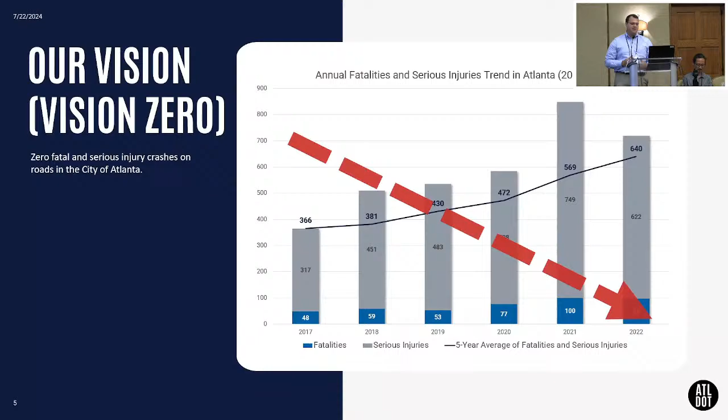Now, the City of Atlanta is a Vision Zero city. What that means is our city council in 2020 adopted the Vision Zero safety program, and that legislation was within just a couple months of the legislation that created our Department of Transportation in the City of Atlanta. So our department and safety have always been very closely linked. This came from the background of our comprehensive transportation plan, completed in 2018, which put safety as the number one system for us to solve, and that's what we've built off of in creating a department and doing our Vision Zero program.

Since then, you can see some of these milestones how these have come. We started on our Vision Zero action plan, which was completed at the end of last year.

We got awarded in 2023 an implementation grant for the Pryor Street and Central Avenue Safe Streets project. And here we are in 2024, we've applied for another grant opportunity from SS4A, which we will talk about.

First, some background on our Vision Zero action plan. This was just completed, hot off the press in November of 2023. Our partners at the Toole Design Group helped us out with this, and it's available on our website, you can go and look at it. My presentation today will focus on three sections: the data analysis that supported this work, our Safer Streets checklist, and our implementation plan.

So first, on the data analysis side. This is a very big problem we're trying to solve, and we have very finite time, resources, and people. So prioritization is key. We've got to focus on areas where we have the best return on investment, the most impact.

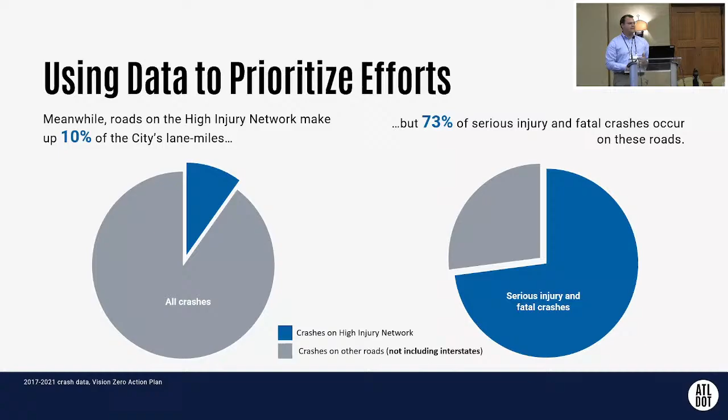In other words, they're 10 times as likely for that crash to result in a serious injury or fatality. So we prioritize them. Next, we looked at locations on different parts of our city. What we saw is that the least safe 10% of our roads in the city by lane miles account for 73% of the serious injury and fatal crashes in the city. This is including our locally owned and our GDOT state routes, but excluding the interstates.

Thankfully, serious and fatal crashes are still pretty rare occurrences. However, what that means is that we might have many locations that are just as unsafe, and we just haven't had one of those serious or fatal crashes happen yet. We hear from people every single day. They'll tell us, I know this is unsafe. Here's the issue: does somebody have to die for you guys to do something about this? And the answer, obviously, should be no.

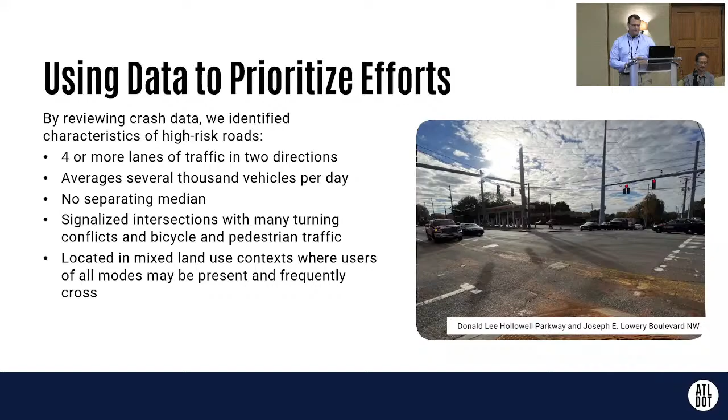So that's where we tried to look systematically at the common characteristics of the areas where we saw high crash rates. What we can see here is roads that have 4 or more lanes of traffic in 2 directions, averaging several thousand vehicles per day, not median separated, a signalized intersection with turning movement conflicts and a lot of bicycle and pedestrian traffic, and mixed land use where we have multiple modes trying to cross one another. With that, we were able to create our systemic risk network.

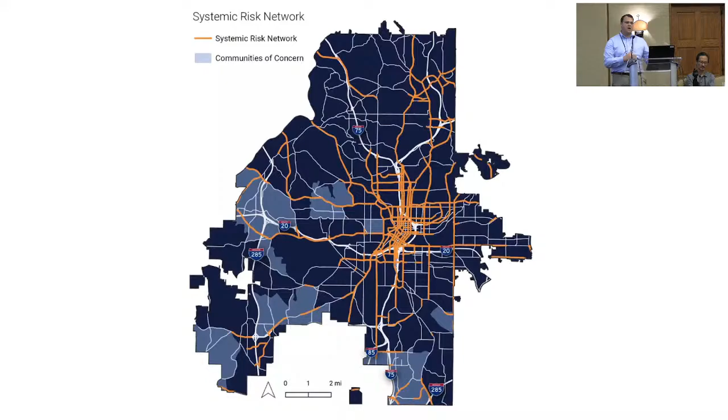This is everywhere we want to prioritize from a safety perspective, not just where there have already been crashes. Next, we looked through an equity lens. We looked at socioeconomic data to identify the communities where the residents who live in these areas are the least well-served by the current transportation system. We know people in these areas are less likely to own cars.

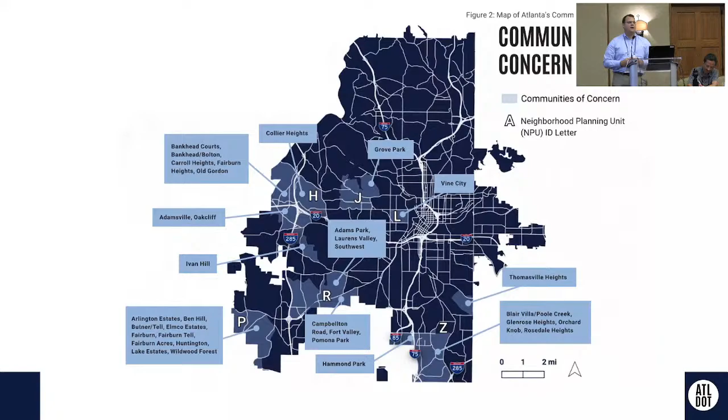Their lives are more likely to be affected negatively when they end up in a crash or they lose access to their car. And when they are involved in a crash, they're more likely for that crash to be a serious injury or fatality. So we prioritize these areas. You can see this map here of our communities of concern. These are mostly in the south and to the west of the city of Atlanta.

That concludes the data analysis portion of our Vision Zero action plan. Now I'll talk about our Safe Streets education guide and Safer Streets selection tool. This is our toolbox, specific to the city of Atlanta, of countermeasures that we have seen to be successful in mitigating the kinds of crashes that we see most prevalently in the city, and which have been replicable. These are things already implemented within the city, and our users and local officials are familiar with these types of countermeasures.

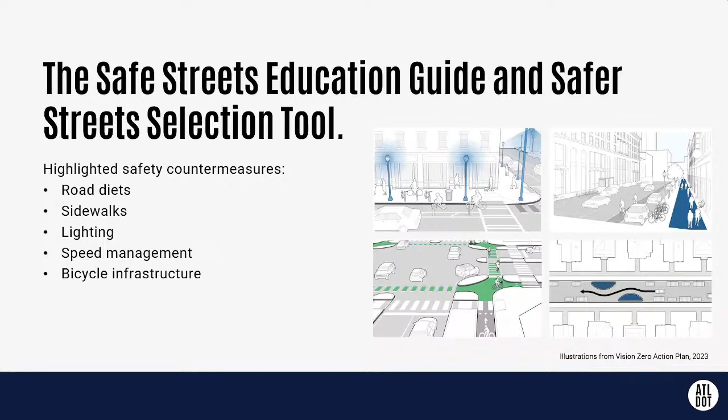This is kind of our localized toolbox, and the education guide and the selection tool work very similar. If you're familiar with GDOT's intersection control evaluation or ICE tool, the goal here is just to put these design alternatives at our forefront, to be considering them in all of the projects that we do, not just for our engineers, but also our elected officials and other leaders within the city.

And then we also have systemic safety countermeasures. These are basically things that we've identified in the city of Atlanta that we say are broadly applicable. We know that they work at any location where it is desired. This can be implemented without any further crash analysis or traffic analysis. And I'll go a little bit more into these as we talk about implementation.

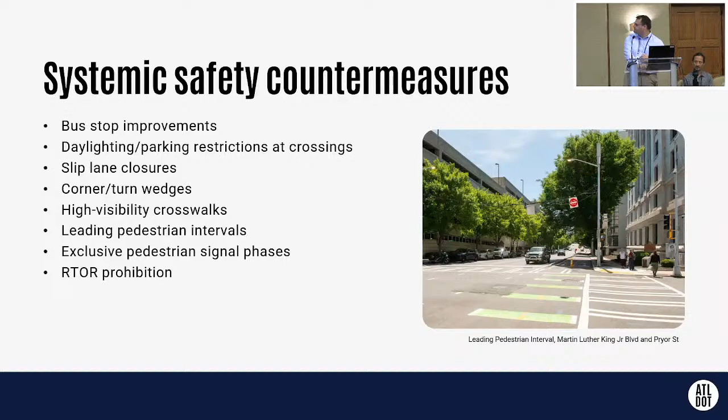Which is where we are now. So our Vision Zero action plan includes an implementation plan, which is built on a few key pillars, I guess you could say. The first of these being our capital projects. So in 2023, Atlanta voters approved a massive $450 million bond and T-SPLOST program to fund capital projects. And so in the locations where we have those capital projects funded, that is going to be this very first opportunity for us to apply our Vision Zero goals.

And that can be doing Safe Streets projects. We have a ton of Safe Streets projects, $90 million worth included in that plan. However, even on projects that aren't explicitly safety focused, we can prioritize which ones we do first based on these criteria that we have, our high injury network and our systemic risk network. And also these projects that aren't necessarily safety focused in nature, we can still make sure that these safe countermeasures are incorporated within the design.

And then next we have other action items. We'll take a look at what some of those are later on. But these near-term actions are sort of departmental and organizational in nature, of just kind of how we position ourselves and the areas that we prioritize our budget in order to try to tackle Vision Zero. And then these short and medium-term actions you can think of as the kinds of things that might lack capital funding, but we know we want to generally see these types of things happening citywide and try to tackle that as soon as we can and find funding for those as soon as we can. So very, very aspirational.

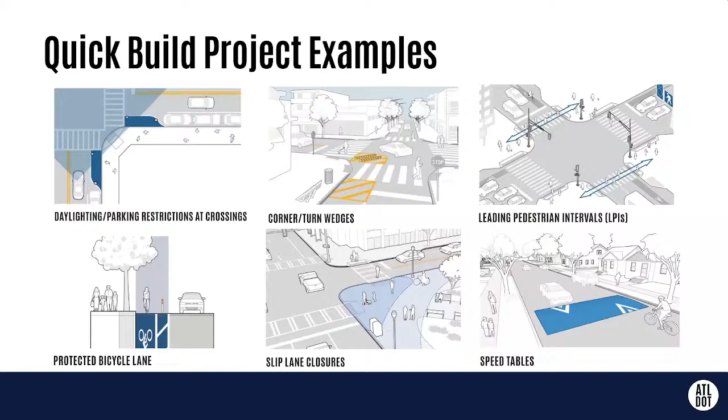Here's an example of what one of those quick build projects can look like. This is something we are working on right now and can get even more funding from this grant opportunity, called micromobility corrals, and these basically serve a twofold function.

First, accomplishing daylighting by setting aside say 20 to 30 feet right in front of an intersection. But then we actually use that space and put in bike parking, bike racks, a place to stop micromobility devices - those Bird and Lime scooters - to have a dedicated area that people can use. So it gives a community benefit as well.

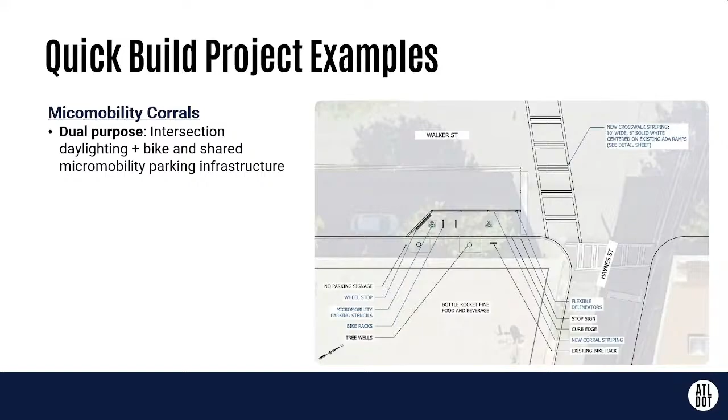The second item included in this grant application, to be funded by SS4A, is our Fatal Crash Review Commission. We've already created this commission, but what we don't have is a dedicated funding source. This would provide dedicated funding every single time we have a fatal crash, to go out and do safety analysis, a site visit, identify immediate countermeasures that could help prevent that crash in the future, and also have that pot of money to do quick build projects on these locations case-by-case.

And then finally, these are other Vision Zero action items that we have - I won't read the entire list, but I've got two slides to show just some examples of the kinds of things in this action plan that are currently unfunded or have very limited funding in our city's budget.

That includes things like creating a striping squad - for those who know our pothole posse that our mayor created, this is just a dedicated team with manpower and resources to address painted striping, illegible markings, and things creating unsafe conditions that require us to be out there addressing them today.

Some other things on this list are LPI implementation. Our city council actually passed legislation calling on our Department of Transportation to implement leading pedestrian intervals at every single signalized intersection in the city where deemed safe, including our GDOT-owned intersections. Even though it's mostly just coding a signal timing change, that takes manpower - capacity we don't have, and we don't have a dedicated funding source right now. In many cases, especially with GDOT intersections, more traffic studies may be needed before we can actually implement it.

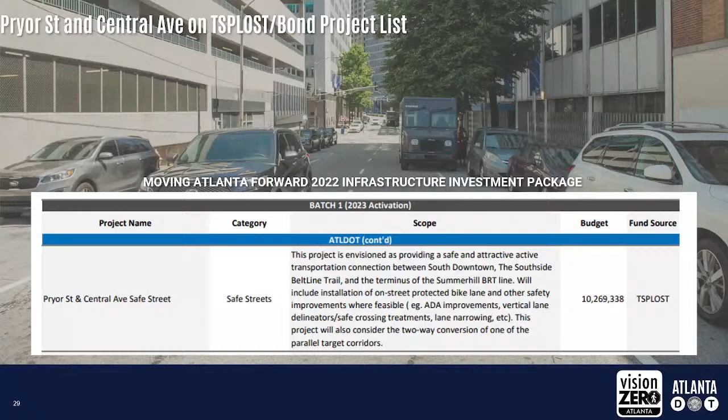We had about $10 million earmarked for this, and this would connect downtown to the Beltline and go through the South Side neighborhood. We were able to take that $10 million and instead leverage it as a local match of 25% in our grant application for SS4A. We were awarded the full $30 million that we requested, giving us a $40 million project budget to extend the limits a little bit further up in downtown, make that full connection to the Beltline, and incorporate some more project features, which I'm excited to tell you about.

So what are these streets? What's Pryor Street? What's Central Avenue? These are a north-south one-way pair in downtown and south of downtown. They cross over both I-20 north and south and I-75. So these are important connections across the interstate.

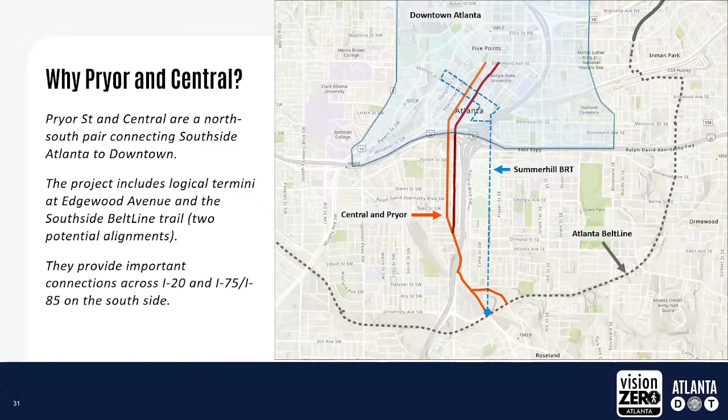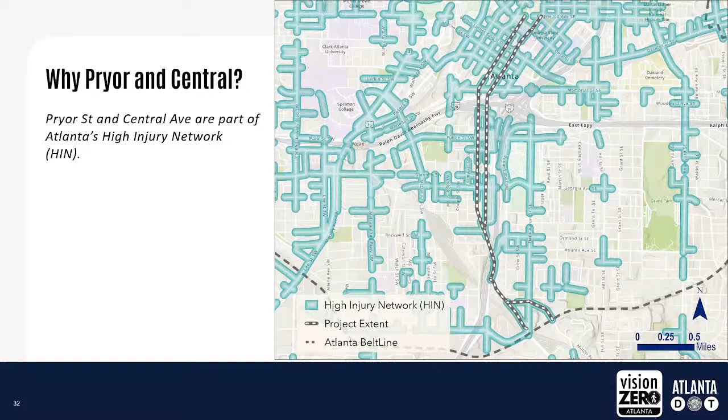Other features here, at kind of south of where that arrow is, they join together at Pryor Road as two-way south of that point. And then you can see where that connects - the dotted line is the current/proposed alignment of the Beltline. Both of these roads, basically the entire project, is part of our high injury network, and you can see it intersects with a lot of other roads that are on our high injury network.

Also from the safety side, we have a big history of historical crashes. Depending on which years you select, we've had a couple of fatal crashes, both vehicle crashes and pedestrian crashes that have resulted in fatalities. You can see a very consistent grid of crashes there in downtown where we have that kind of bumper-to-bumper traffic and a lot of signals.

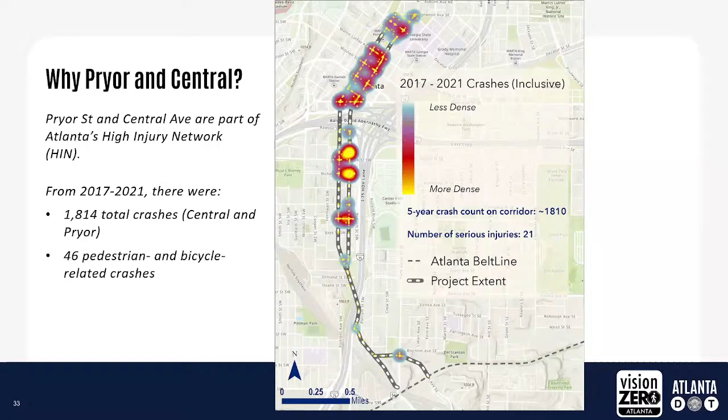And then more focused clusters of crashes south of I-20 where we have higher operating speeds. We've got some on-ramps and off-ramps going to and from I-20 and the downtown connector. And so that speed differential, and where people are getting over multiple lanes either to get on the interstate or to make a turn right after they got off of the interstate, is resulting in these serious crashes.

From that equity standpoint, that south side neighborhood that's in this area that would be connected is a historically disadvantaged neighborhood in Atlanta. It's one of these that has been affected and separated by the interstate system that came through Atlanta. So this is an opportunity to help to connect and to better that neighborhood as well.

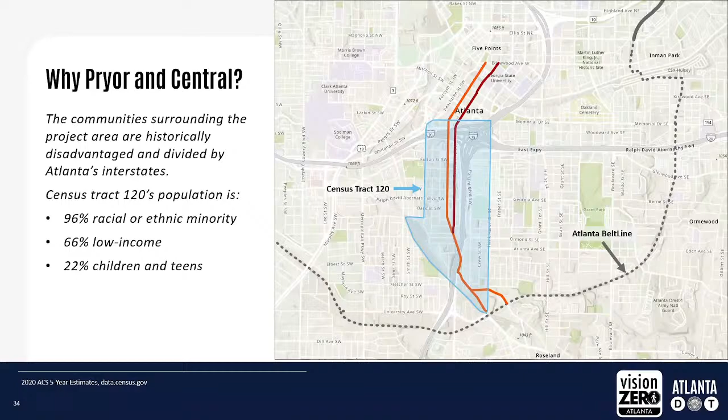Another great opportunity with the Pryor Street and Central Avenue project is we just have a very, very big canvas to work with. We have a lot of space out there. We've got 3 to 4 lanes dedicated to vehicles in each direction, sometimes a combination of travel lanes and parking lanes. We've got a lot of space out there to hopefully reutilize.

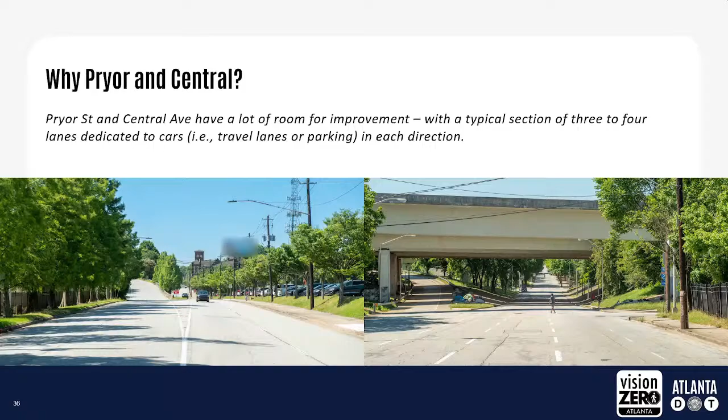You can see this is right where they come together or split, depending on your perspective. This is where, like I was saying, we have on and off ramps with the interstate. And you can see that hostile infrastructure for pedestrians, where we do have sidewalks just kind of disappear when the interstate comes around. That takes precedence, obviously, and not a very pleasant place to bike either.

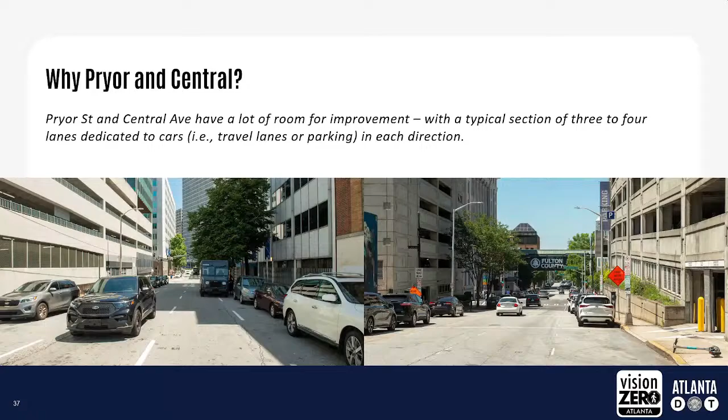And then you can see what that condition looks like in downtown - more space for parking, a little bit slower moving, but a lot of vehicle lanes there. So what are we going to do with this project?

First and foremost, we're going to resurface - that's about 4 miles of roadway. We are going to repurpose those vehicle lanes, essentially a road diet. We are going to put in protected bicycle lanes with that space that we've won back from the vehicles, right? And then all of these, with this big budget we've been able to have, is going to allow us to really, hopefully, achieve Vision Zero for this corridor.

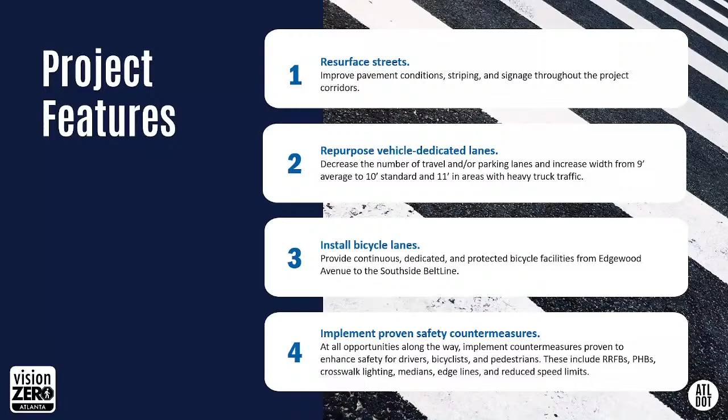And then just on where we are. So we're currently in design. We're actually working on the procurement of our design consultant right now, hoping to finish up design in 2026 and complete construction in 2029. One key element of the Safe Streets for All program is we have a hard cutoff. We have 5 years to build this or we lose the money. So we are working very, very hard to hit that deadline to get through design and to get shovels in the ground and do this.

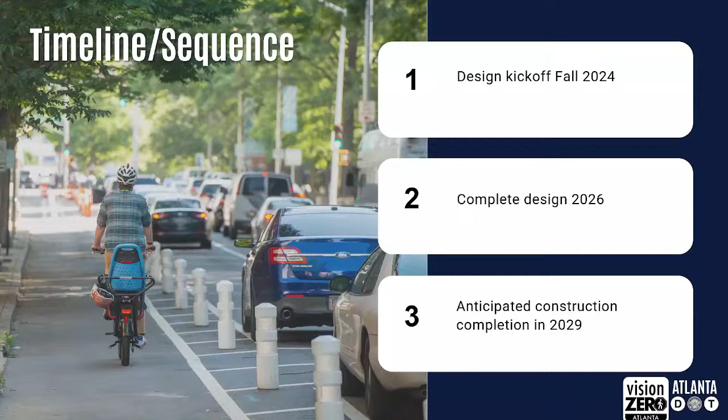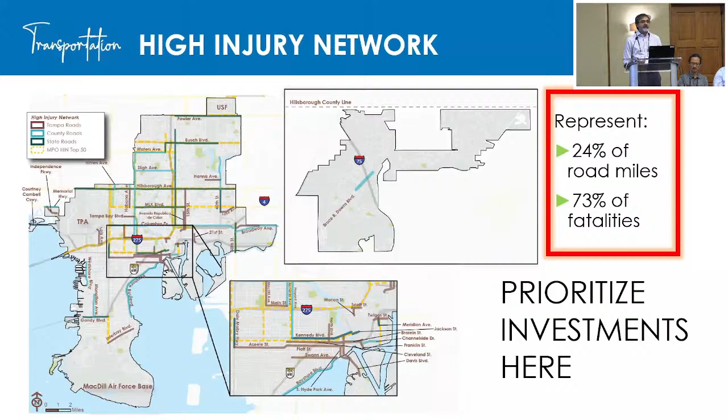So it's clearly much more than an engineering challenge. It's a social issue as well, and it's about what we ultimately as a society accept between efficiency and safety, and how do we reconcile that. So these were our marching orders.

We knew where to target these investments. The next was, what do we do about this? How do we get the benefit out there the most? The Safe Streets for All program presented an opportunity to significantly ramp up our quick build program, which uses temporary materials in lieu of concrete and more expensive materials, with some paving—which for most cities tends to be the #1 complaint in community value surveys and things like that. So it was kind of getting a bigger bang for our buck.

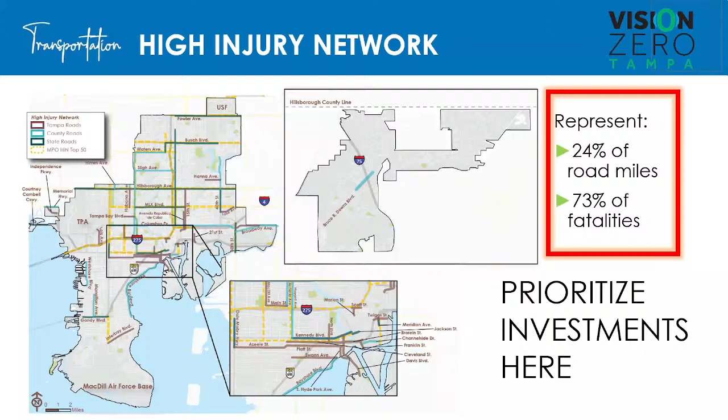And then we applied that systemically. So using our Vision Zero action plan, which is, of course, based on a safe systems approach, but we're also using systemic safety—meaning if a facility is seeing certain kinds of crashes, similar facilities may at some point also have the same problem. So kind of keeping that in mind and putting a program together.

With that in mind, with the $20 million award and $5 million match from the city—so total $25 million—we have 3 types of projects. One are triage projects, quick builds on our high injury network, to quickly get speed reduction measures, better crossing opportunities, better visibility, and redesign for bike and peds. The other are preventive care, safety improvements near places that people go to—parks, schools, transit.

And now we also have a Safe Routes to Food program, especially in lower income, lower access neighborhoods, where single parents may be lugging around 4 or 5 grocery bags along with 2 children. That Safe Routes to Food becomes very essential. That's something they do every day.

And then we also had a comprehensive pedestrian safety and equity action plan along with our MOVES, which was our mobility plan. A big feature of this was equity. That's in the name itself, Tampa Systemic Applications for Equity, T-SAFE, wherein 3/4 of the budget will be spent in communities of concern. Again, that's where the problem is, that's where the money is going, and we'll just touch upon what some of those projects look like.

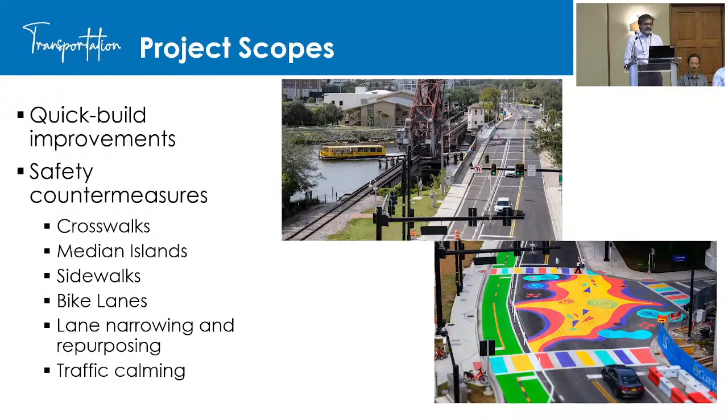That segment of the river walk does not go under the bridge. You do have to come back up on the surface, and so we've made it a little more prominent. Of course, these are all quick build projects, meaning we do hope at some point to make these much more permanent installations. So let's look at projects in general.

You've got East Tampa, Ybor City, that area in general, or historically, has been a strong African-American population or majority neighborhood. Again, a lot of arterials in the area, some collectors as well. So we've got most of our projects within that zone, if you will.

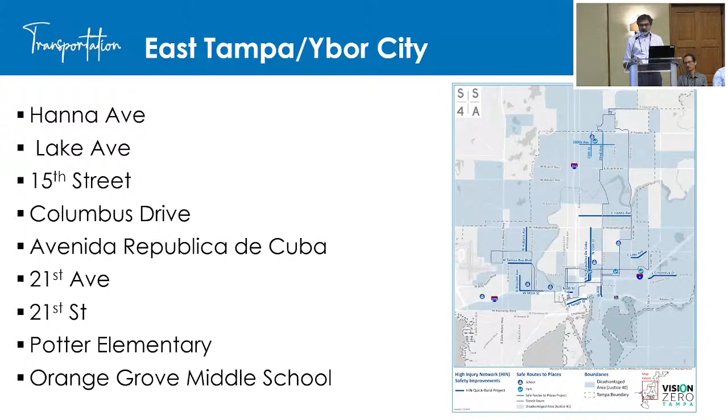And of course, this slide is for people that are more familiar with the geography, but there's a lot going on out here. Ybor City is a historic entertainment district. You've got a lot of interstate work happening in the area. And so a lot of these projects, what they aim to do is not just improve safety, but improve connectivity across the interstate, across water bodies. So connecting neighborhoods is part of it, and of course you see schools as well.

West Tampa is the other diverse neighborhood, majority Hispanic, Cuban immigrants. In fact, a lot of the Cuban immigration or migration happened before Miami in Tampa, and that predates well over 100 years back. And in Florida, there's this ongoing rivalry who came up with the Cuban sandwich, Tampa or Miami. I have a clear preference, but that apart.

So similar projects in the West Tampa neighborhood as well. West Tampa is also separated by the interstate, but also the river. So all the things that are going on in the downtown area and the Ybor area are not as well connected to West Tampa. A big improvement or a big announcement on that, as of last week, we just approved, or council approved, a contract to build a river walk on the west side of the river as well.

Tampa currently has a river walk on the east side through a build grant and other funds. We're now embarking on building that river walk that will activate the waterfront and extend Bayshore Boulevard, which is like the signature Tampa facility, and create a similar facility for neighborhoods on the other side of the interstate, and a lot of imaginary boundaries that were drawn across neighborhoods in the past.

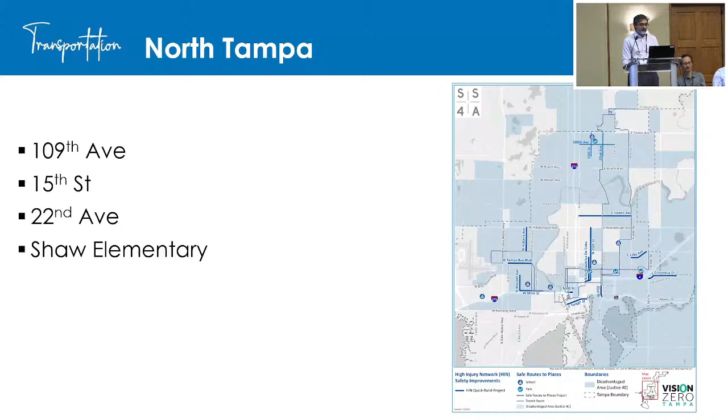North Tampa, this is by the university area, 15th and 22nd, 15th Street, 22nd Avenue, used to unfortunately be referred to as Suitcase City, meaning there were a lot of transient populations out there, people moving in and out, a lot of people that were transit dependent or walking and biking across very high-speed arterials. So some of these projects, along with the school out there, would benefit that area as well.

And in the downtown area, we've got Twiggs Street and Scott Street. So Twiggs is one of the streets in our downtown. Our downtown's a peninsula, water on three sides, that connects the channel on one end to the river and the river walk on the other end.

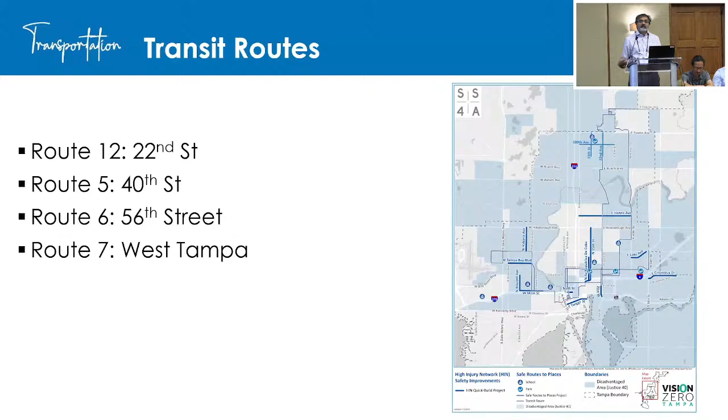And it has been contextually, even though it's part of the CBD, a faster moving roadway because of certain connectivity issues. So that was part of this suite of projects as well. We're also making better connections to transit routes, combining enhancing stops with enhancing access from neighborhoods, mainly in East and West Tampa, to transit routes.

That was part of our application and our projects also. So where we're at right now is we've done our initial planning and project development. Council just approved the grant, so we're in the process of procurement to bring on a design build contractor. We're going to try something different, creating fewer pay items, a tighter scope, and putting a design build option out there with a fixed sum to get a team that can do the most work out of it. Some of the match related work we've already started on, and it's time for implementation.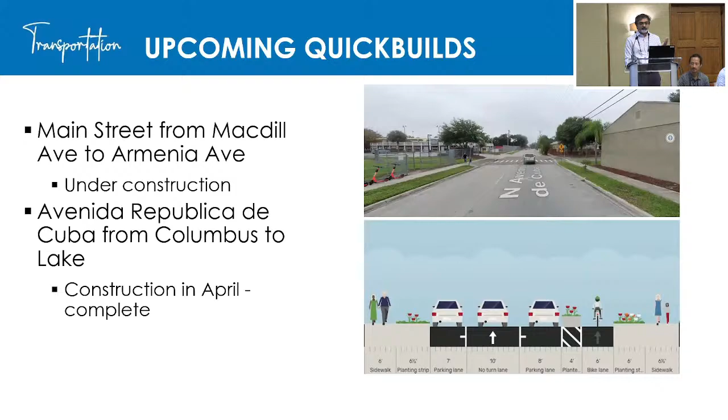Some of the upcoming quick builds that we have, I mentioned our paving team and our engineering teams work together on that. Both of these are actually complete. This is a slightly dated presentation. Main Street and ARDC were both completed last year, actually, and those were supposed to be parts of our match for the Safe Streets for All grant.

So we've also won a Safe Streets for All planning grant. That was in '23. What we just saw were projects relative to the '22 grant. Part of that, plus the build grant for the Riverwalk, plus two raise grants, similar grants connecting communities, and we have a reconnecting communities grant as well. All of these are helping transform Tampa's fabric from car-centric primarily to a city that's a little more friendly to pedestrians and bicyclists. I say a little more friendly deliberately because we have a long way to go.

All of these are quick build projects, concepts that we know will work because they're based on works in other cities as well, and we'd like to build on it. But my message to other cities is part of this success, I feel, is because we had more comprehensive planning, that five-pronged working across silos. We have a resilient Tampa plan that connects to our Vision Zero Action Plan. Our Vision Zero Action Plan is a subset of our Moves Mobility Plan. Having all of these planning efforts happen concurrently, and our Parks Master Plan as well, working together and pointing at each other really sends a message to funders that you've done your homework and you expect better outcomes hence.

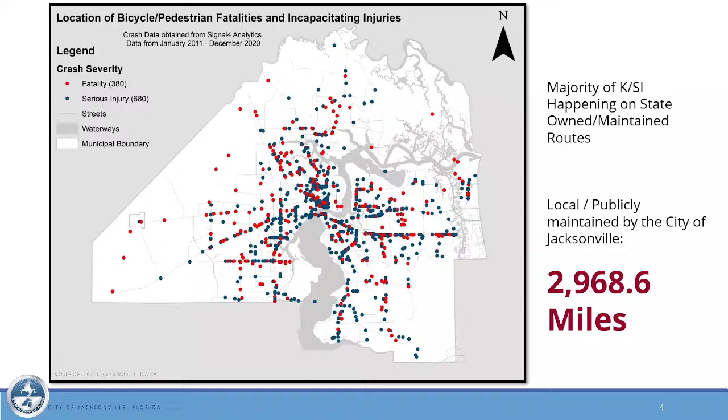But we are one of only 2 out of the top 20 that are actually getting a little bit better. It seems like the bicycle and pedestrian fatality rate keeps expanding in a lot of these other cities.

This may come as no surprise - let me talk about some more crash statistics. From 2014 to 2023, there were 396 pedestrian fatalities in Jacksonville. In that same time frame, 60 bicycle fatalities.

This is one of the reasons FHWA in 2016 began their targeted approach to safety, coming up with focus cities within focus states. They've since adjusted that to focus MPO regional areas, but the focus states remain. Florida is a focus state because we have higher than national average pedestrian and bicycle fatalities. We're also in a focus MPO area, the North Florida TPO, so we got kind of double whammied on that.

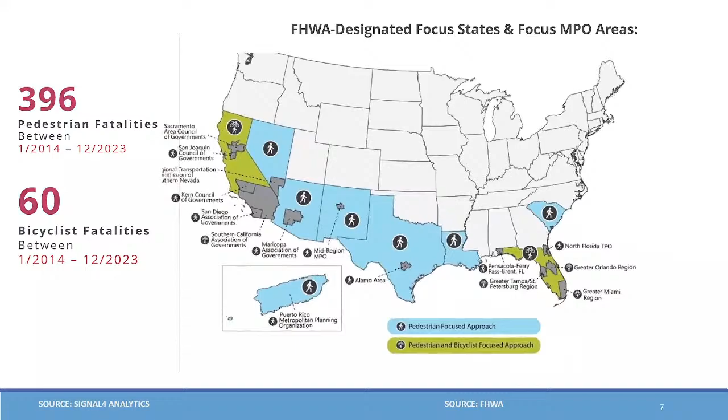The one good thing about being a focus state or focus MPO area is we get prioritized for technical assistance from the federal government. They've been really gracious with us - anytime I say, hey, can you come down and give a workshop, I'll pull together 60 planners and engineers, and they're right down there six months later teaching a classroom full of engineers all the latest design guides and roadway design practices.

This brings me to my side narrative - if you're an engineer who works closely with planners, have them reach out, even if you're not a focus city or MPO area, and see if you can get some workshops to bring in the latest designs. It should sort of be on the planners to bring these brand new designs to the engineers.

This statistic came about right as I was beginning my tenure at the city of Jacksonville. The first thing I did was ask about all of our bicycle facilities - I wanted to see where these crashes were happening. They said, well, we don't have a map of any of this stuff. So the first thing I did was create an inventory, and I wanted everything on there.

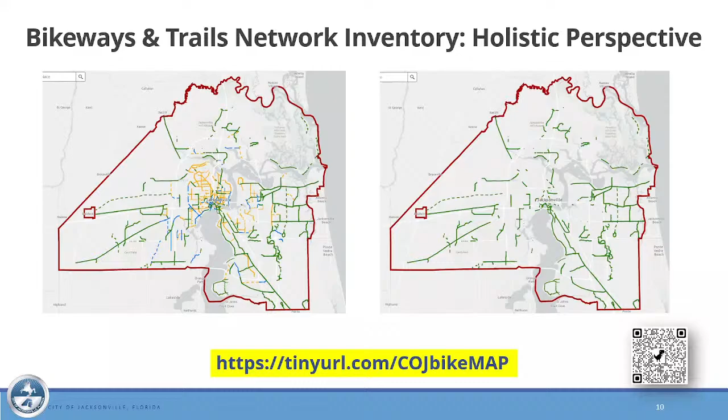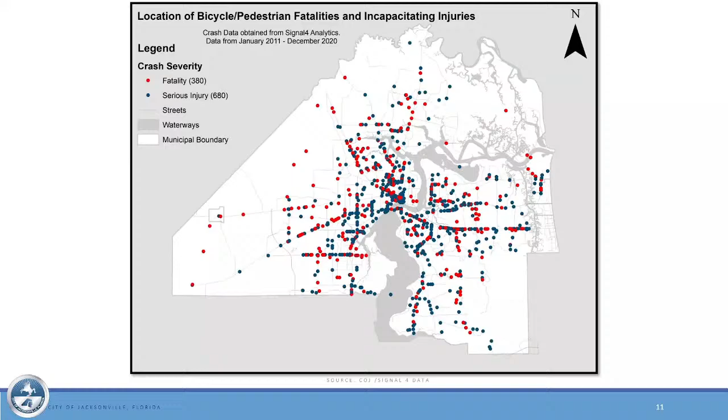I also jumped back to that crash map I was looking at from 2011 to 2020, and I thought there's a really interesting correlation - there seems to be a lot of reported fatalities and serious injuries right where we already have a lot of these bicycle facilities existing.

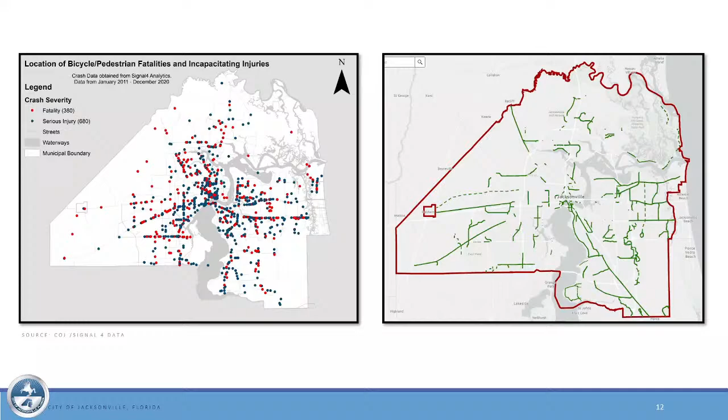So I thought, why is it so unsafe, even in areas where we have a lot of bicycle facilities? The answer I was able to find by looking at the attributes from the map we had made was the facility type. When you really break it down, we realized that in Jacksonville, almost 80% of the existing network is unbuffered bike lanes, which we know is one of the lowest on the hierarchy of things that feel safe and comfortable to ride.

You really want to focus on getting shared use paths, separating cyclists and people walking from vehicle travel. If you can't do that and you have to be in the street, make it a protected bike lane. That's second on the hierarchy. If you can't make it protected, go buffered, or if you can't do that, go with a wide, just striped out bike lane. But following this hierarchy, we realized most of what we had really wasn't that great. It was all a bunch of unbuffered bike lanes.

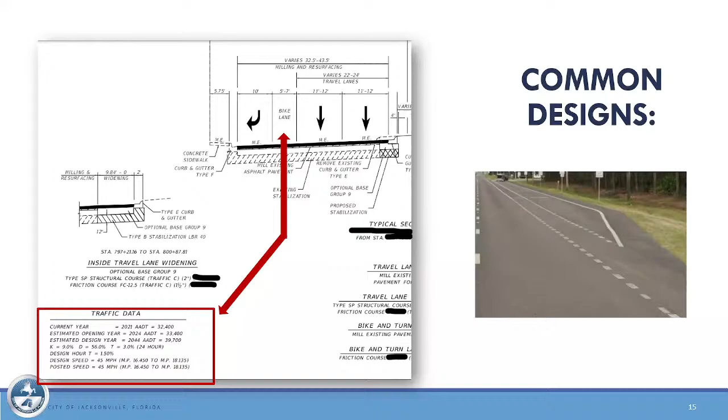One thing—when a planner goes to engineers, especially if the designs are already chugging along, and says, hey, I think we have a better idea, we could reduce the conflict area, whatever the solution may be, or the better roadway design—a lot of the responses we get are: well, it's not in the budget, it's not in the scope, it's already been approved by a bunch of people, here's a bunch of names, or the facility already includes bike lanes. So we're just going to keep it as it is, which isn't the greatest.

So with all of those responses, we said as a city, it's our priority that we're going to prioritize the 8 to 80, all ages and all abilities groups. We're not going to allow these 4-foot unbuffered bike lanes to come through, and we're going to look at that hierarchy of infrastructure and make sure that there's not only a facility there, but that it's safe and comfortable.

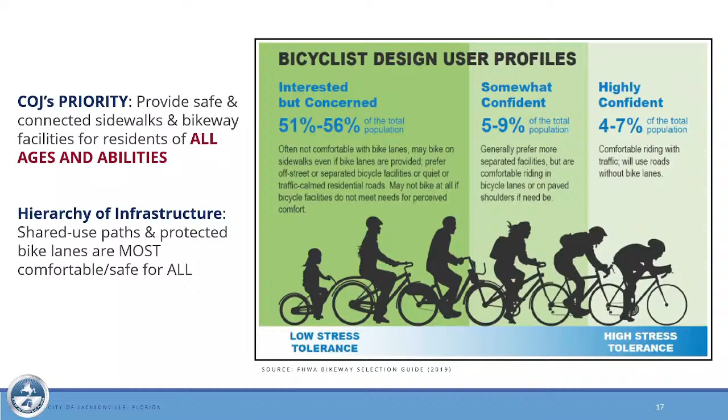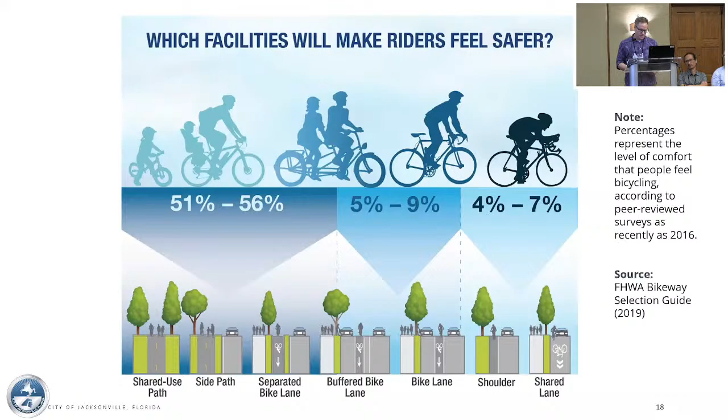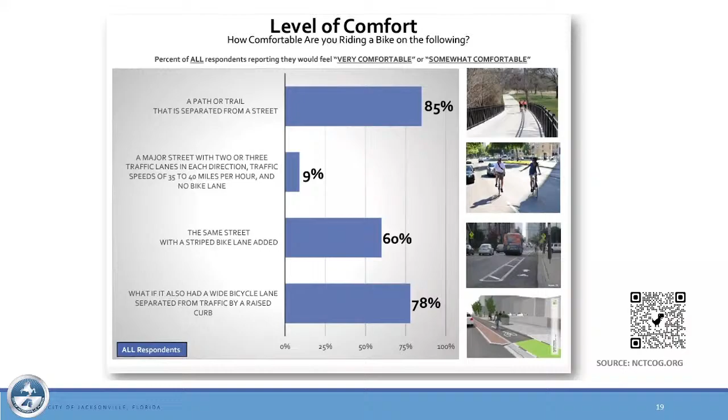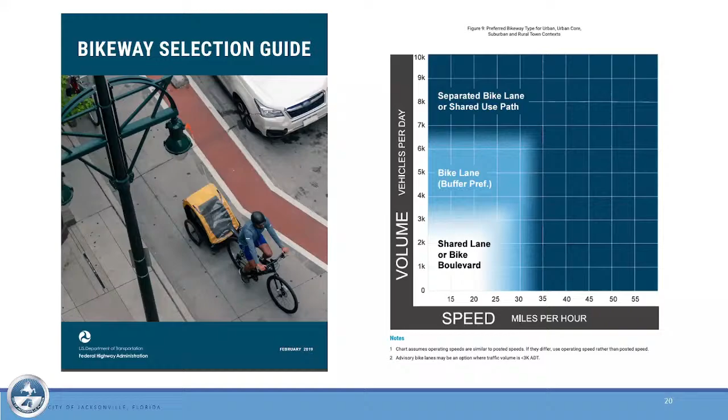I think a great rule of thumb, I'm sure many of you are familiar with this, but defaulting to FHWA's Bikeway Selection Guide from 2019, they have this awesome table that I always reference. It shows you, it puts the AADT on the y-axis and gives you the posted speed on the x-axis. I think this is such a great rule of thumb for when you've already designed most of the roadway and you're thinking, what do we want to put here for bicycles? This is a great graph to look at and say, okay, let's say we have 8,000 AADT and a posted speed of 40. We're going to do a shared use path. We've met this requirement. I think we've done our best.

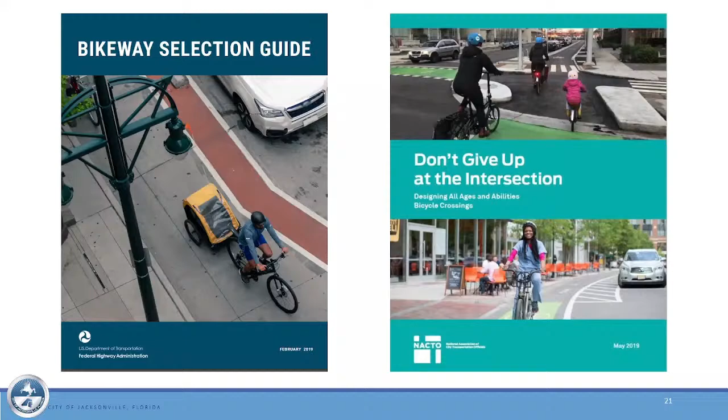This guide is also really great in tandem with Don't Give Up at the Intersection by NACTO. It goes over all of those protected intersection designs that you can utilize. It's very common in Jacksonville to have a great bike lane, but then we need to put all those left turn lanes and things at the intersection, so the cyclist is just left hanging 60 feet from the intersection. We really want to make it continuous through and keep them going. I always liken it to if you wake up and drive to work, you never think, well, I hope all the roads connect me to my job. You just know it's going to be a connected network. I think if you use this Don't Give Up at the Intersection approach, you're getting to that point with cyclists as well.

Through our Vision Zero action plan, we want to identify our high injury network. We're going to take the same systemic predictive approach. We don't want to chase fatalities, as it's called, saying the high injury network is from this fatality to this fatality. If the land use, the lanes, the posted speeds, and everything around it are similar beyond that fatality, then I think you should extend your high injury network. And that's what we're going to do.

We're also looking at a lot of recommended policies and actionable items, performance targets, performance measures, everything to get us going in the right direction.

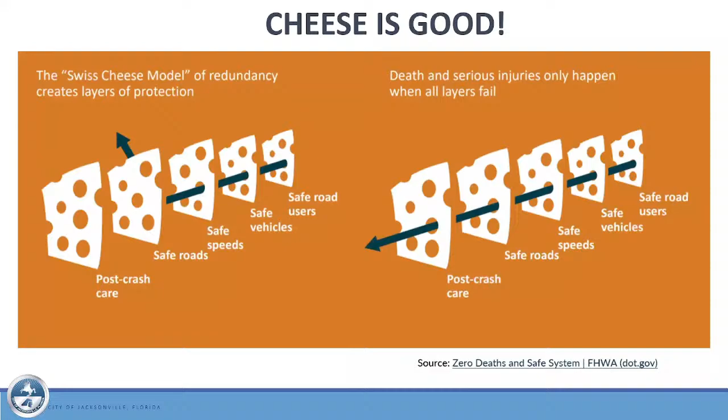Sorry, I'm chomping on my mint here.

We didn't want to wait for our Vision Zero action plan to be completed. Like I said, we're just starting it. So we went ahead and did a speed study as a way to preemptively strike some of these safety issues, which we finished this year.

I'm going to talk a little about how this also includes infrastructure investment. Investing in infrastructure was one of the problems we had in Jacksonville, where even if you proposed a shared use path or something safer for people to ride on, it just didn't have a lot of feasibility behind it.

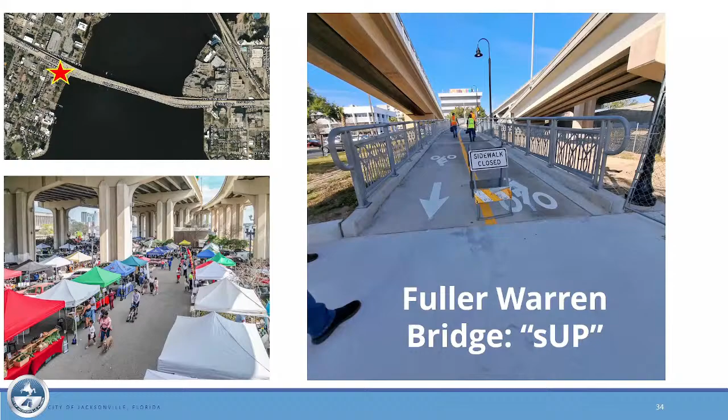So we had this shared use path, this $15 or $20 million shared use path that was going to be built by our state. I was able to go to the final bridge inspection, and I said, hey, can I add some counters just to see how many people use this, do a quick before and after? Because they hadn't actually included that in the original project.

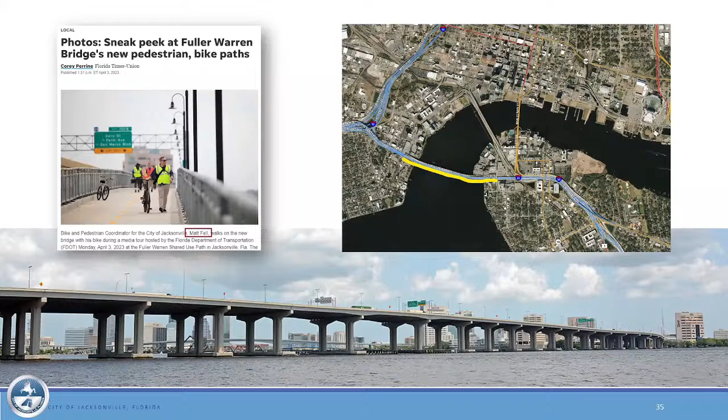And what we saw was 83,000 people used this shared use path that our state had built within the first 4 months. So it was a way to prove demand, which I think is a responsibility of planners, to help out engineers. You can't go to an engineer and ask them to do something really expensive without showing that there's demand for it and that it's going to be used.

So having planners use these counts and collect data that supports this type of demand is critical, I think, in getting a safer system. That Fuller Warren shared use path became the third most used trail in all of Florida within the first year, which is great.

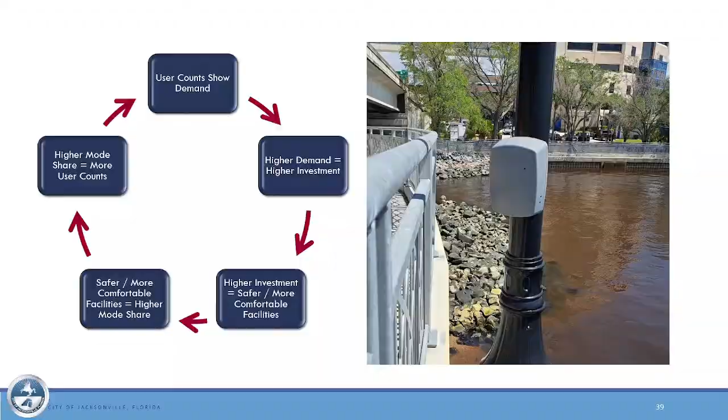Again, this reiterates how planners should use counts and show demand, and that helps grease the wheels whenever engineers want to make something more substantial that supports bicycle pedestrian infrastructure. Once we got that first Fuller Warren Bridge count and showed that demand, I kind of went crazy with counters, collecting all this data around the city, showing, hey, we need this stuff, and people really want it.

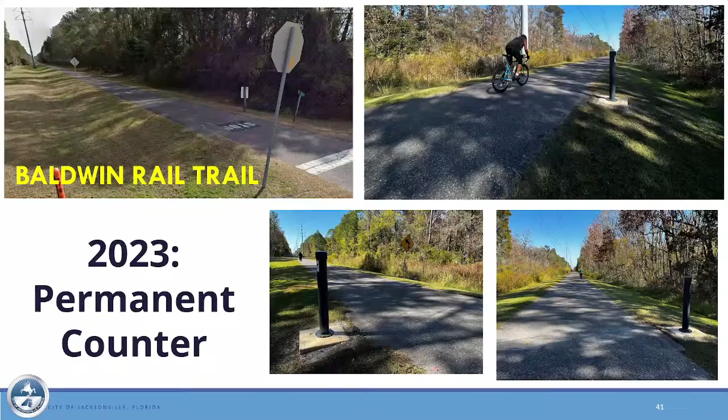We're not just a beach community adjacent city. We are a city that could be bicycle pedestrian friendly for everyone. Luckily, we had a downtown system of trails called the Emerald Trail, and that got a $147 million Reconnecting Communities grant. That trail system is now going to be built in half the time, and it's actually 16 miles in from the coast.

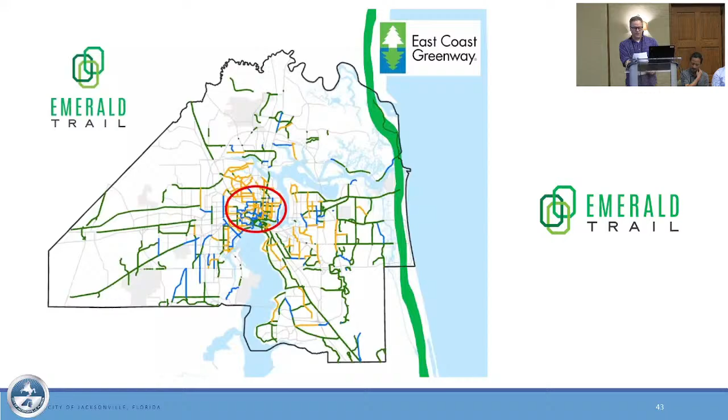We want to connect these things so everybody in the city can use them, not just the people downtown, especially since the East Coast Greenway will be coming down the coast, and we want to loop in with that.

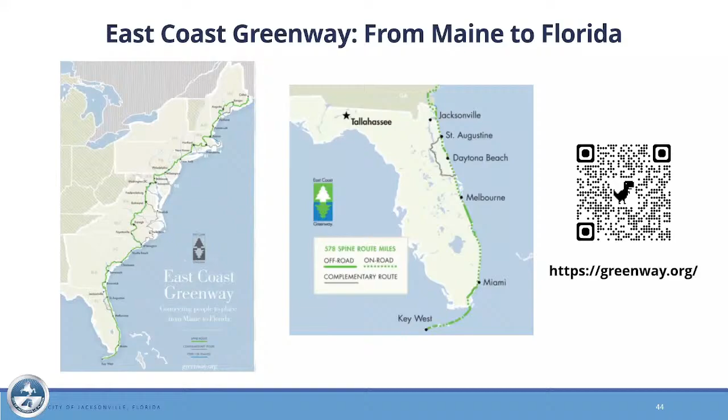Most of you may know about the East Coast Greenway, but it's a huge trail system along the East Coast from Maine to the Florida Keys. Sometimes they call it the lobster to manatee. That's something I think every city or state along the route wants to tie into, and we're no different. We wanted to do the same.

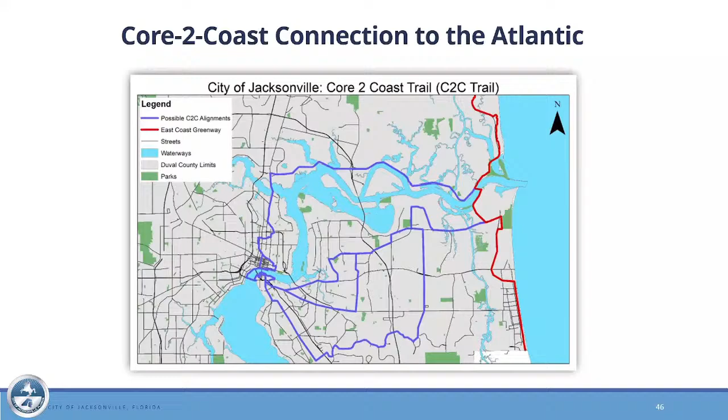This is a part of it that goes right by the convention center we're at right now. We're looking at connecting to that through a trail. We're doing an alignment feasibility study right now called the core to coast connection, so we would connect that urban core to the coast.

So a quick summary of planners and engineers working together. It's really important that we do work together, get feedback, and teach each other, working early on in projects and not waiting until things are at 90% design to say, hey, can we put some bulb outs here?

Planners must develop master plans, long-range transportation plans, share project best case studies, and share the latest guidance documents so everyone is abreast of the latest designs. Planners should also organize training workshops and bring engineers into that so people can see what's new.

And planners should document demand, as I mentioned with the shared use path, and solicit public buy-in through user counts, studies, and outreach to show that there's demand for this and make it easier for engineers to create those designs. That's it. Sorry, I went over my time a little bit. Thank you.

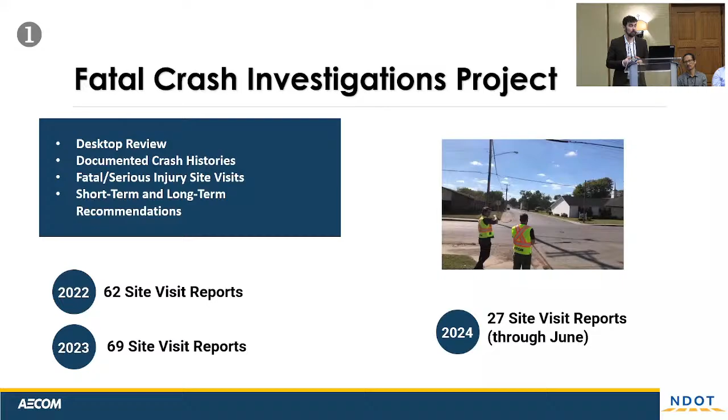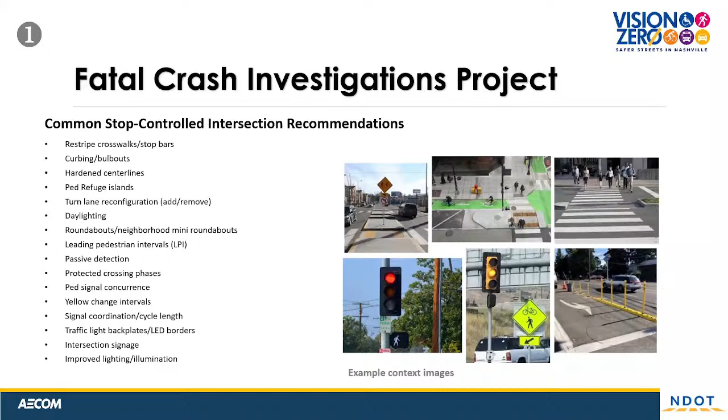I'm not going to read all of this, but essentially, the types of countermeasures we're recommending include a variety of striping, signage, configurations, signalization, operations, lighting and illumination. There's a pretty broad spectrum, and these are the most common countermeasures we recommended at stop controlled intersections, and similarly here are the most common countermeasures recommended on roadway segments at non-intersection locations.

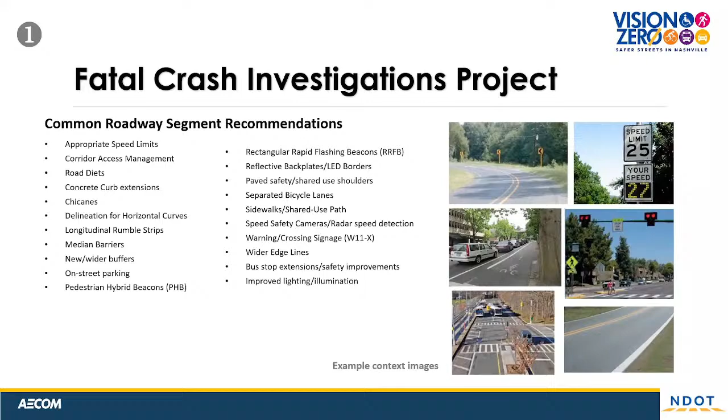The city is now in the process of implementing these. They've passed a memorandum and are allocating a large pot of funding every year to traffic safety improvements. Some of these are already being implemented - I don't have that number with me today, but I can show you some of the work we're doing to help them start facilitating that.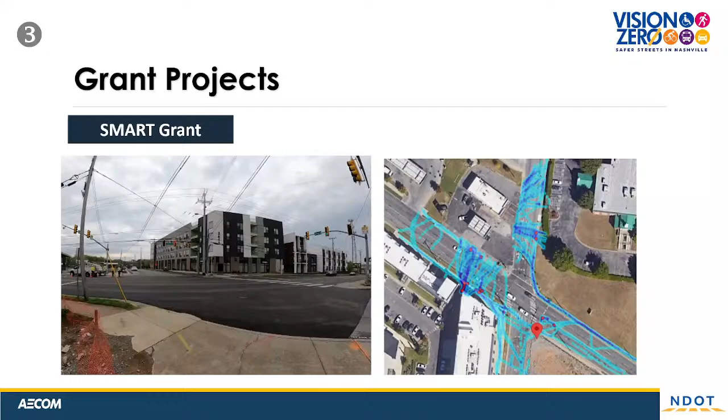In addition to targeting the improvements, this SMART grant also had a workforce development component. We worked with several universities in the area and involved graduate students. We did some onboard intercept surveys on transit routes and found out what people's preferences or concerns were along those routes. We're also doing some workforce training, working with a couple of the agencies within the area.

NABCO, and there's another one I can't remember the name of, but we're helping them provide training to their staff on how to install remote sensing equipment monitors, so they can actually go out into the field. There'll be a workforce available in Nashville to continue this project and help measure where close calls are happening or where pedestrians are crossing outside of crosswalks.

Another grant project I want to talk about is a multimodal grant we just helped the city apply for. This was on Dickerson Pike, a 1.2 mile section where there were 7 pedestrian crashes over the last few years. We helped them with preliminary high-level planning locations for some hybrid beacons, concrete medians, improved striping, curb ramps, signage and detection, providing some cost estimates for that as well.

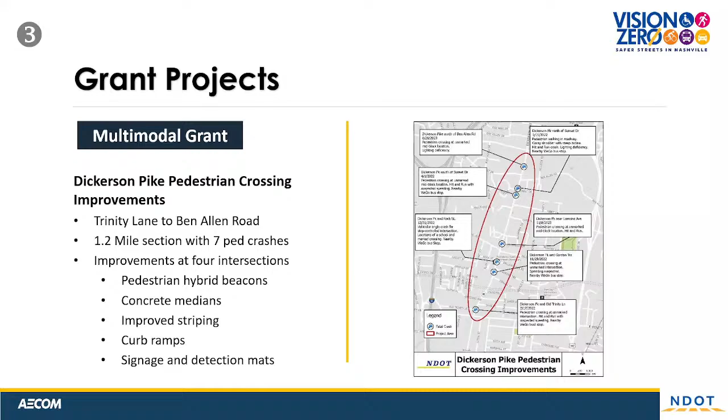Now I want to talk about the last component here - this idea of helping communities go from plan to action. The following slides are not all necessarily relevant to Nashville. These are slides and information we have utilized in several communities. It's things we are discussing with Nashville, but not things they've necessarily committed to, so keep that in mind.

Ultimately, a lot of communities are either moving to or have a plan in place, and that plan may identify a high injury network, priority areas. Some of my colleagues talked about addressing those areas with the greatest equity issues. They may set guiding principles and action themes. But in order for a city like Nashville, or another city with a lot of funding that wants to move quickly to actually implement projects, there's a need for a project pipeline - the ability to develop and track projects quickly. So we've developed several tools here that we're hoping to utilize to help them with that process.

We've developed these tools in other places - I'll mention those places as I go through the following slides. A prioritization tool, a countermeasure application tool, looking at plan concurrence, developing KPIs or metrics, developing public interfaces, and an annual Vision Zero program of projects.

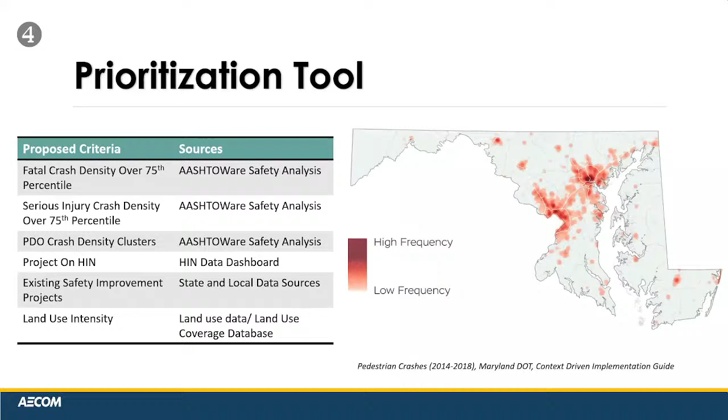We helped them, AECOM helped them through this process where we looked at a series of criteria to help identify where those hot spots were, where we didn't just look at where fatal and serious injury crashes were happening, but where the crash densities were highest.

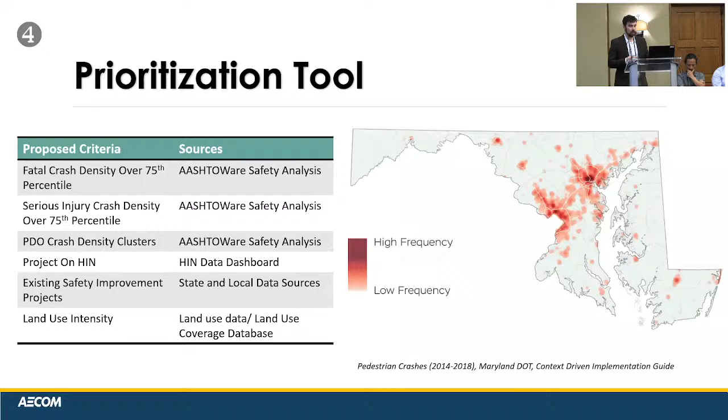So those areas with over the 75th percentile of crash density, those with over the 75th percentile fatal and serious injury crash density, the crash density of non-injury crashes, the location of projects already on the high injury network, the location of existing identified safety improvements, maybe already on a STIP or another measure, and the land use intensity. You can combine all of these things, and this may make a bit more sense, to start to prioritize projects.

You can look at those different types of crashes. You can look at demographics. You can look at short trip opportunity areas — those along a transit route or with mixed use density and development that would enable more shorter trips. So you can highlight the important elements in those areas. These factors all come together from both the prioritization side and the areas of need, and you're able to identify the highest priority locations.

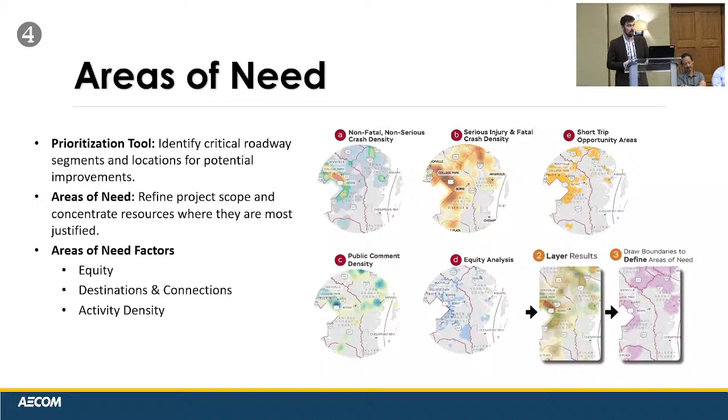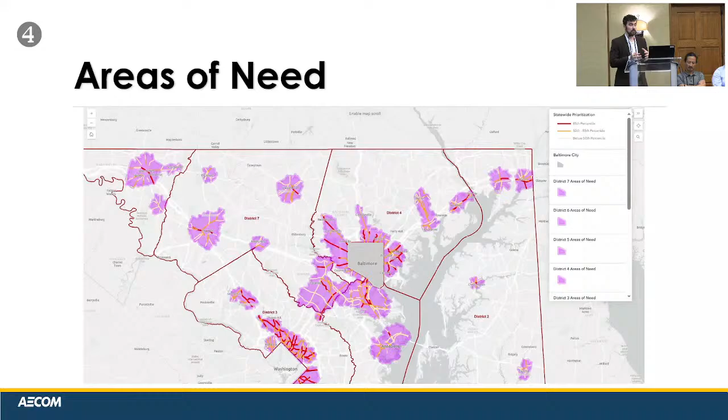This next slide provides a bit more context. Again, this is from the Maryland DOT, but you can see here where we have the high injury network overlaid with these areas of need. So you can start to take that broad high injury network and home in on those focus areas a little bit more.

Okay, the next thing I want to talk about briefly is a countermeasure application tool. We started out in Nashville talking about the 28 proven safety countermeasures developed through the Proven Safety Countermeasure Initiative through the Federal Highway Administration. But we also wanted to develop a broader toolkit.

I know some of my colleagues here talked about the toolkits they have provided. We looked at the common guidance from NACTO. We also looked at the Federal Highways Multimodal Networks Guide from 2016. We looked at peer communities — in this case, Maryland DOT and the countermeasures they recommended. We also looked at the countermeasures regularly being recommended and incorporated through the Fatal Crash Investigations Project there in Nashville. Through these processes, we identified 50, or a little over 50, countermeasures that aligned with these different sources.

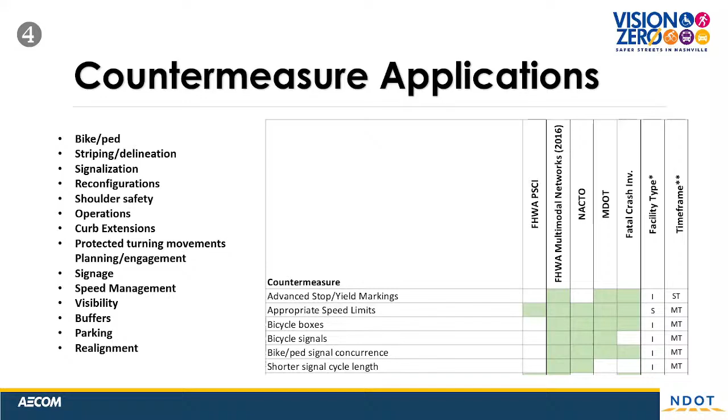So we have a table that looks at how each of these countermeasures aligns. These are the general areas those countermeasures fall into: bicycle and pedestrian, striping and delineation, signalization, roadway reconfigurations, shoulder safety, operational improvements, curb safety or curb extensions, protected turning movements, planning and engagement, signage, speed management, visibility improvements, buffers, parking, and realignment.

We basically identified whether countermeasures would be strongly recommended, suggested, or require engineering judgment, based on criteria mentioned by my colleague from the Federal Highways Bikeway Selection Guide and the Pedestrian Design Guide — looking at roadway speed, traffic, land use, and other conditions to recommend certain types of countermeasures. So for all of these, we're providing this table so you can quickly see where throughout the city different types of countermeasures might be recommended, or in any one segment, what types might be most recommended.

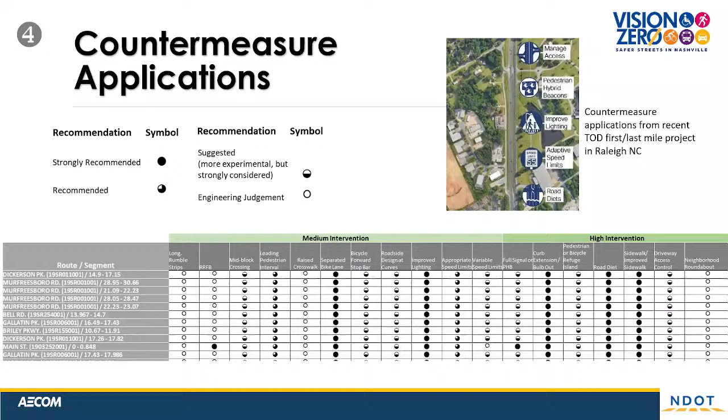Finally, I want to talk about performance indicators. There's a couple of these that have been adopted by the city of Nashville, but a lot of these are indicators that we've looked at with other communities as well. So you look at the 5 common E's of Vision Zero: engineering, evaluation, encouragement, education, and enforcement.

Now, I know what's missing here is equity. We consider that as flowing through all of them. And you can come up with both lagging indicators and leading indicators for each.

Lagging indicators would be those produced through fatal crash investigations, where you're looking at what's already happened, providing a responsive approach. Leading indicators look more at a safe systems approach, where you're looking at what can we change about the existing environment to prevent future crashes from happening or make them safer.

So for each of those areas, we have identified some of the common lagging and leading indicators that we have utilized or discussed with our communities.

And then finally, I just want to touch on a couple of things that my colleagues have touched on here, and that's the safe systems approach and the 5 E's. When talking about the safe systems approach, I really want to boil it down into 3 areas. And that's making sure that any solutions you provide are addressing cause and context.